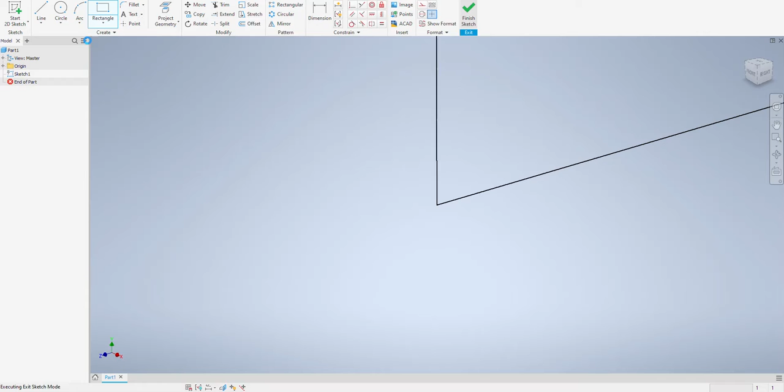The base is 1.5 by 3. I'm going to go ahead and extrude that base 1.5. So I have 1.5 by 1.5 by 3 right now.

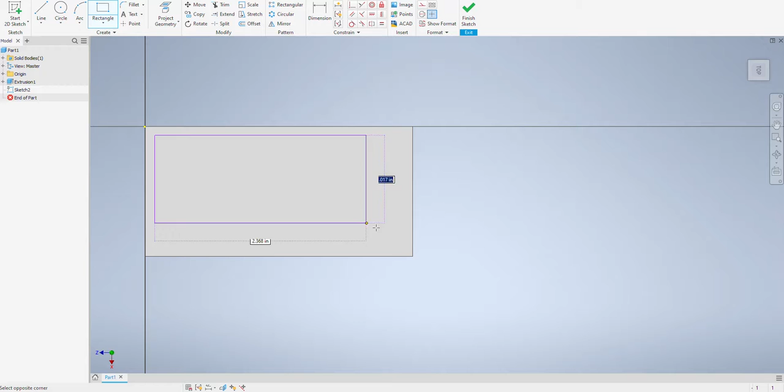Now I'm going to go ahead and draw on this to put the crowns in, starting with the center cavity. I'm just going to draw a rectangle in there and give it dimensions for the wall thickness of 1/4 inch.

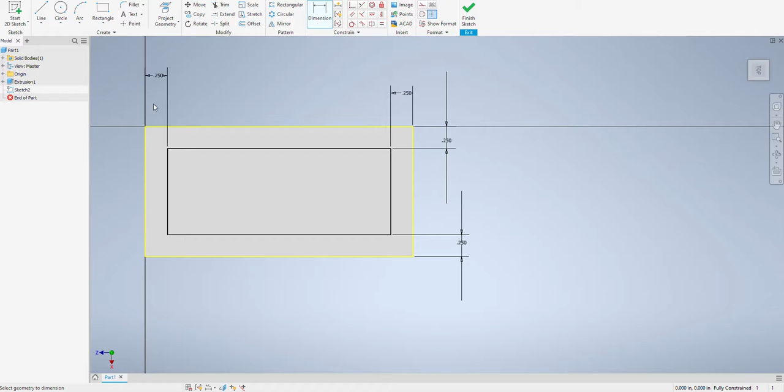For a dimensioning tool, I'm grabbing each line and just dimensioning between the lines. Finish, extrude that shape, cut a 1/2 inch down, 0.5.

We got the cavity. Now I got to make the crowns, so I'm going to sketch on the top again. I'm going to just make a rectangle like this, bigger than I need, and dimension from here to the edge of the rectangle to be 1 inch, and from here to the edge of the rectangle to be 1 inch, which leaves a 1 inch crown.

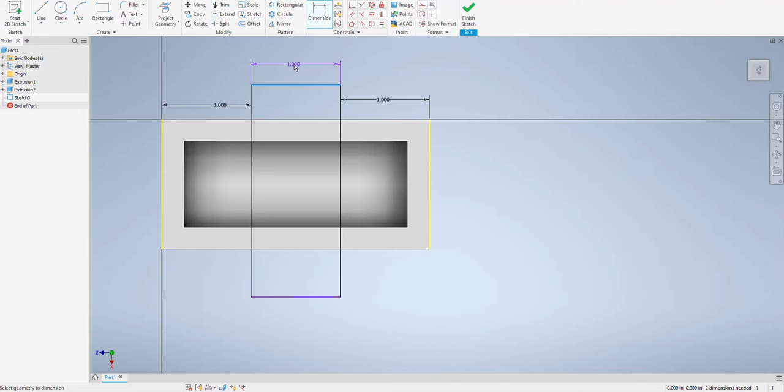Do the same thing in the other direction. Dimension from there to my edge of the rectangle in that direction is 0.375, 0.375. That should give me a 3/4 inch crown.

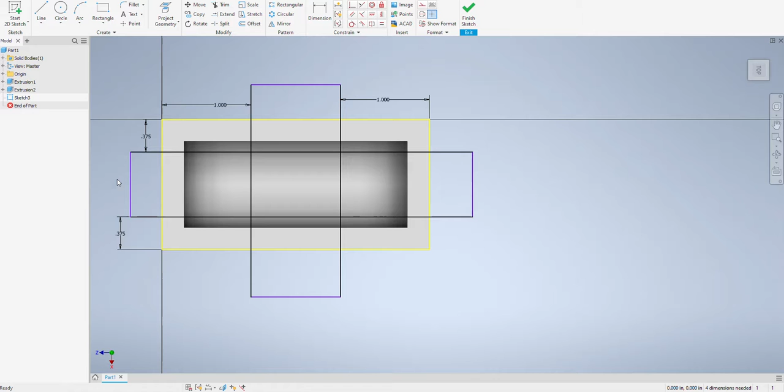Okay, finish, extrude. I want all of this, and I want all of that. Cut 0.25. There's my crowns.

All of that so far is not new content, but what we're going to be drawing for the feet now, for both sets of feet, is going to be new content.

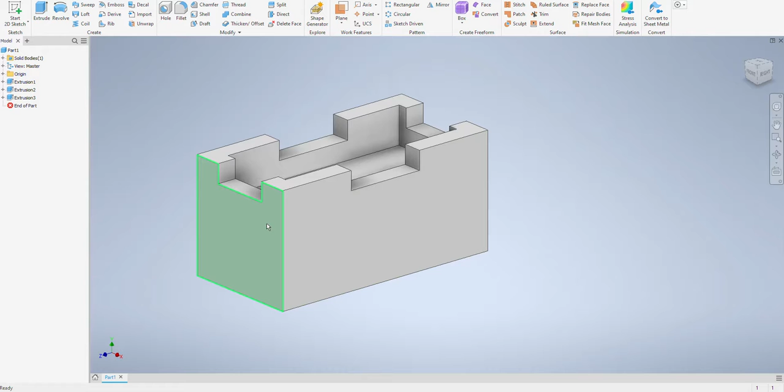First one we're going to do is a work plane. A work plane is like just another surface we can draw on, like we can draw on any of these surfaces, but if I want to draw in the middle of the part, I need a work plane.

So I'm going to go work plane tool. I'm going to click and drag on this front surface backwards. Click, hold, drag, and that's a negative direction. Halfway through the part would be 3/4 inch, so negative 0.75.

Now I have a drawing plane right through the middle of my part. So I can do sketch on that surface, and now I'm drawing, as you can see, right in the middle of the part.

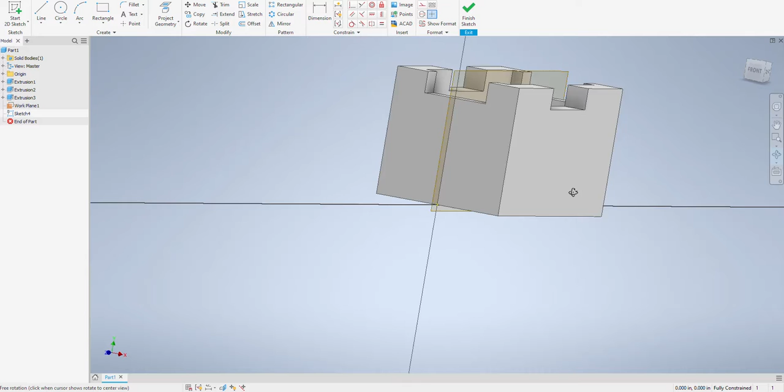Here's a quick tool so that you can see the middle of the part, nothing in front of it. I'm going to go to an isometric view when I do it just so you can see it happen. We are going to right-click, slice graphics.

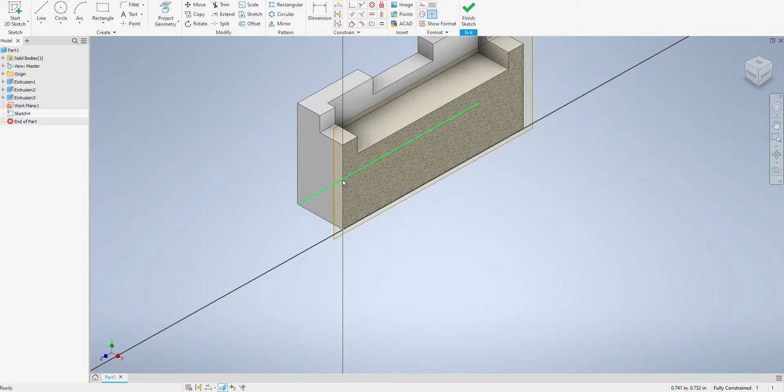Now we're in a sketch on a part that has stuff in front of it. So right-click, slice graphics, and it gets rid of everything in front of your sketch. So now I can draw my side feet.

Another new tool is going to be project geometry. I want to get this line as a line I can actually use. Right now it's not. I want that line, and I want the bottom line.

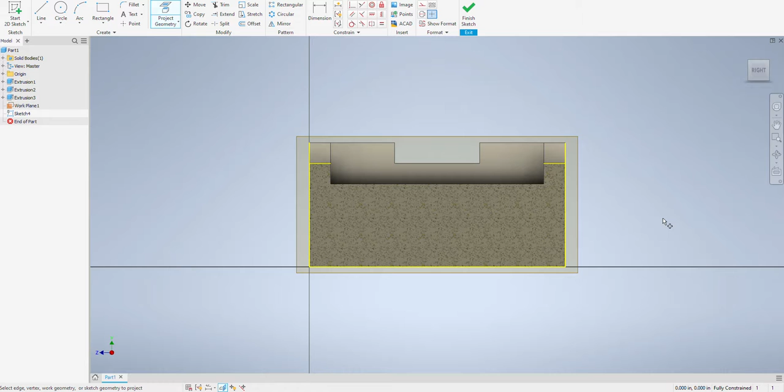So I'm just grabbing a couple of lines that I want on my sketch. Now that I have those, I'm going to draw my triangle foot. So it comes out here, 0.375, 3/8 of an inch.

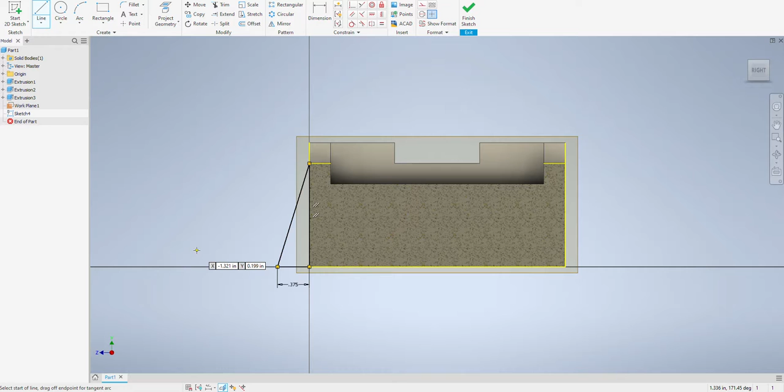New line, it goes up here until it meets that intersection. And then I'm going to close it off. There's my foot. When I finish sketch, you see I have a triangle in the middle of the part.

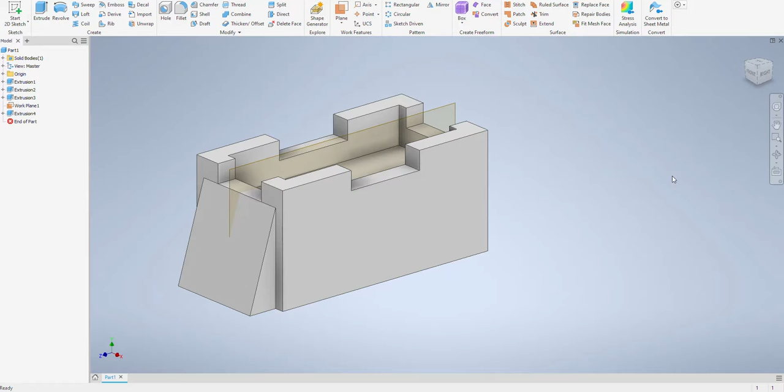I'm now going to extrude, adding material, so I'm leaving that, but I'm going to extrude it both directions along the midpoint, and it's going to extrude 1.25. And there is that foot.

Now I can do that all over again to draw the other side, or we can look at another new tool, which is going to be mirror. I'm going to make a copy of this foot along the center point to make a copy over here.

So I need another work plane in the middle of the part. Work plane, this time this side, grab, drag, -1.5, and I've got a work plane going through that direction.

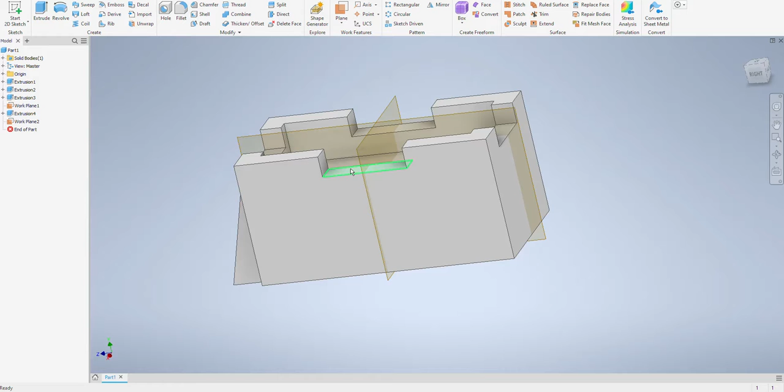So now I'm going to use mirror. Right here, what do I want to mirror? This foot right here. Mirror plane, I want to mirror it across this work plane. And it shows you it's going to make a copy over there.

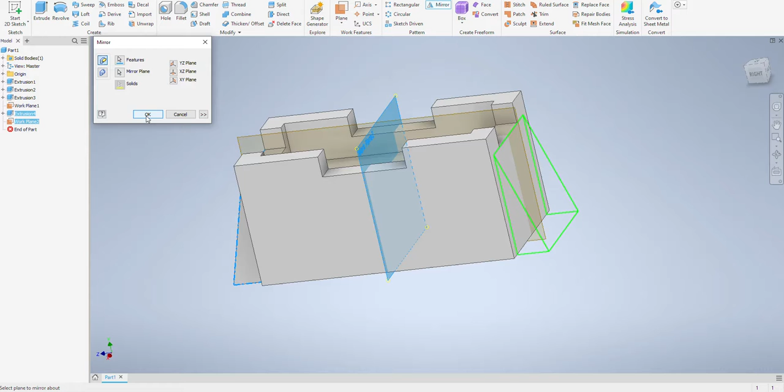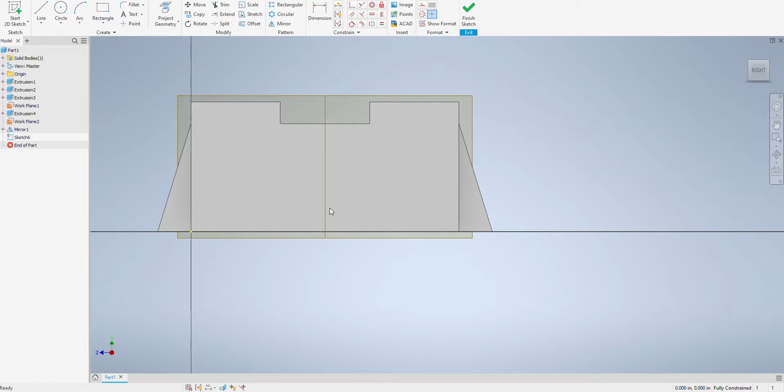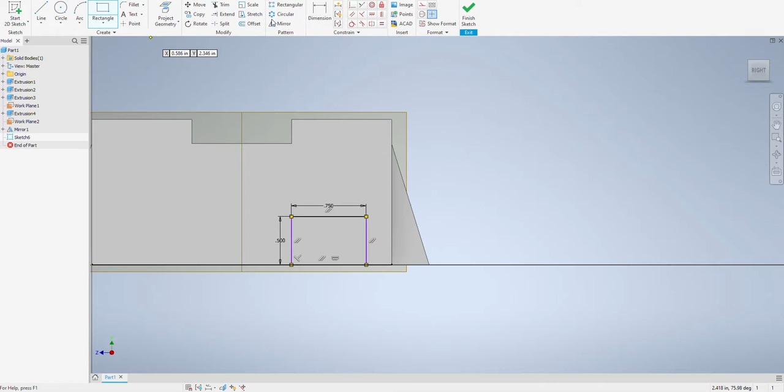I'm going to sketch on this main front surface. And I'm going to draw the back rectangle of the foot. And that is 0.5 tall by 0.75 long. And I know where it is. It's along the bottom, which I drew it on the bottom, and I'm going to dimension to the edge. That gap is 0.375. Finish.

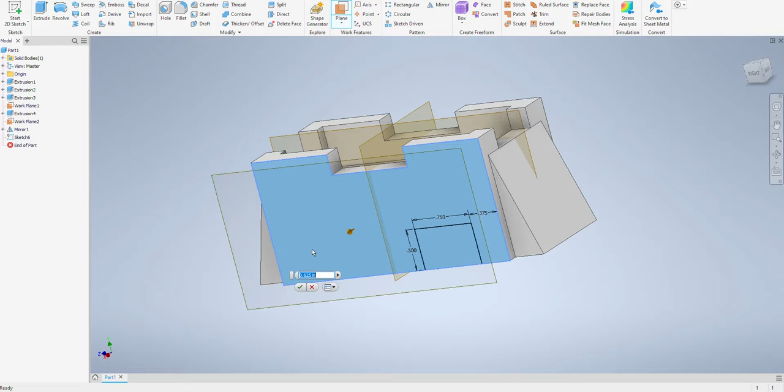You say, well, that's not the foot, and I agree, it's only the back part of the foot. The front part of the foot is out here in space. So again, we're going to use work plane. I'm going to grab this front surface, click, grab, hold, drag it out this time, not into the part, but away from the part. And I'm going to bring it out as far as the foot is. The foot is 0.5 out. So now I've got this work plane hanging out in space.

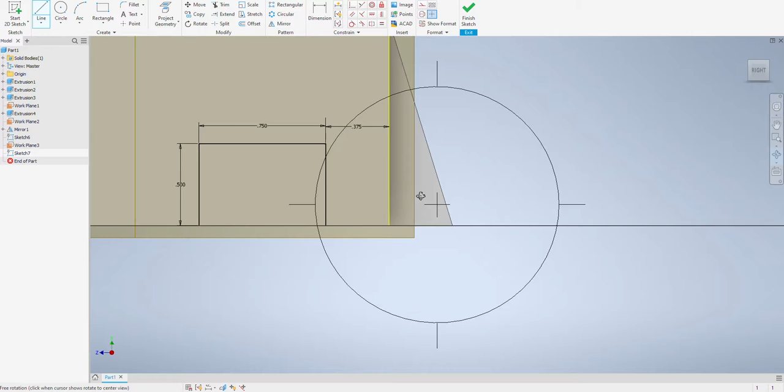I'm going to sketch on that work plane out in space. And I'm going to draw the front portion of the foot. But you'll notice I can't snap to any of the lines that are back there because they're not on this sketch. They're on the back sketch. I'm drawing out front. Well, we already used a tool that's going to bring those lines to us, and that was project geometry. So project geometry, I'm going to grab those 3 lines, and now, because they're on my sketch, I can use those as references.

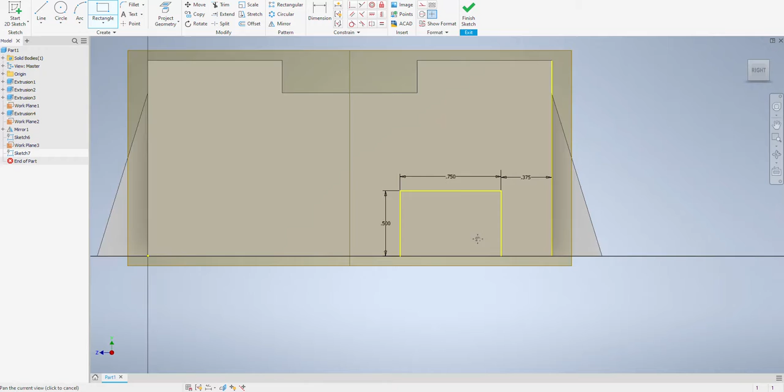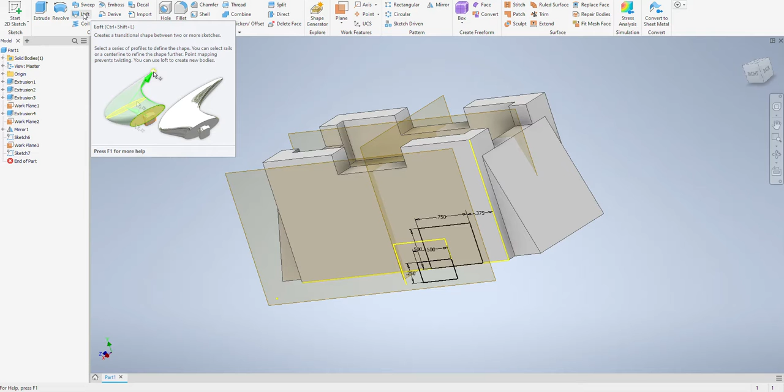So, rectangle tool, from this intersection out, the smaller foot is a 1/2 inch by a 1/4 inch. Finish sketch. And now we have sketch 6 as the back one, sketch 7 as the front one. Yours might not have the same numbers, but that's okay. And now we can use a tool called Loft. Loft is going to combine 2 sketches to make a shape. As you can see in the demonstration, when I hover on the icon, it's taking all kinds of goofy circles and ovals and making whatever shape that is. We're just going to go from 2 different rectangle sizes.

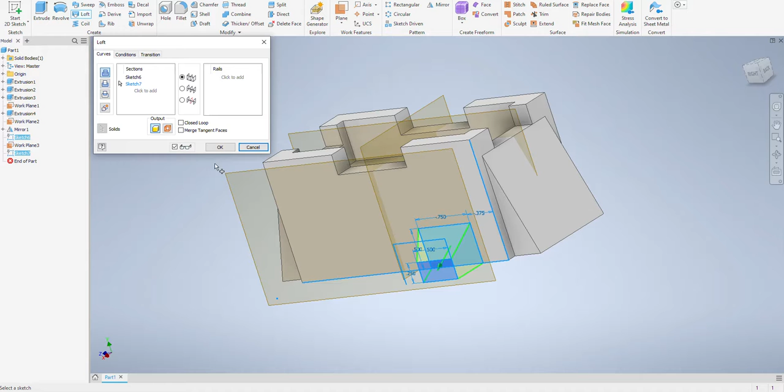So Loft. In here, pretty simple, click to add. So I'm going to click on the click to add. I'm going to go grab my back sketch, and it automatically grabs the rectangle. I'm going to come in here and do the click to add again by clicking this, click to add. And I'm going to come grab the front rectangle. And it shows what it's going to do, which I like, and okay. And there's the foot. Don't worry, we're going to do this again as practice.

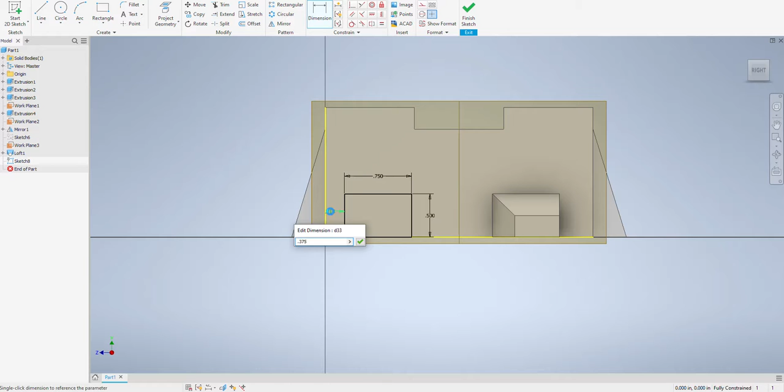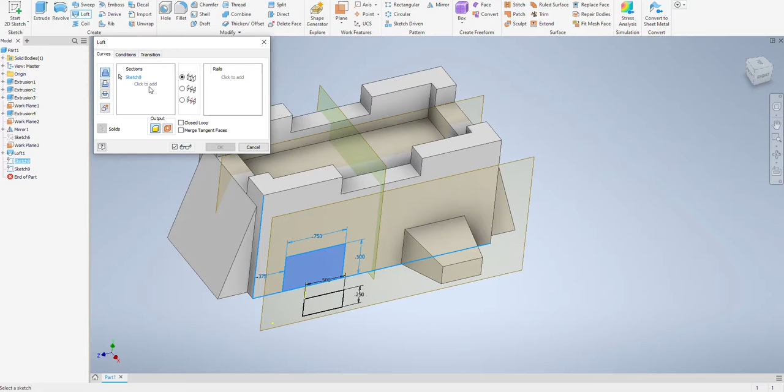So we're going to sketch on the back. We're going to make a rectangle that is 0.75 by 0.5. We're going to dimension it to the edge of the part to be 0.375, 3/8 of an inch. Finish. That's sketch 8. We're going to sketch on the front work plane out in space. We're going to use project geometry. And now we're going to draw the inner rectangle to be 0.5 by 0.25. Finish. And then we're going to loft, click to add, grab that back sketch. Click to add, grab the front sketch, and OK.

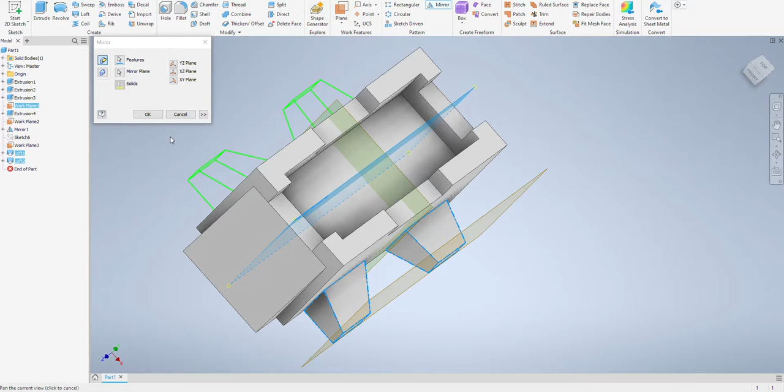Now we can keep doing this 2 more times, or we can just mirror these 2 feet across the part. Well, we've already done mirror, so mirror this and that foot. The mirror plane is the mid work plane. If we rotate, we should see it showing us copies, and OK. And there is your base plate.

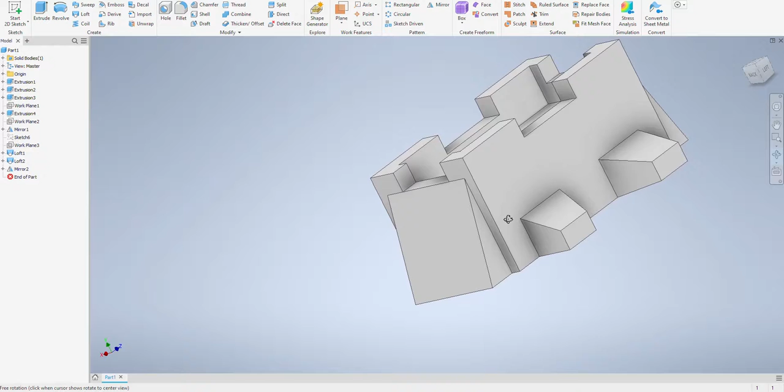We want to turn off all these not needed work planes. All we do is visibility. So right click over here, visibility, right click, visibility, right click, visibility. We're not deleting them in case we need them again. All we did was simply turn them off. So once you've gotten to this point, hopefully you've saved a couple of times as 3D02 base plate, and you can now upload that IPT file into Google Classroom to be graded, just like we did with the support file.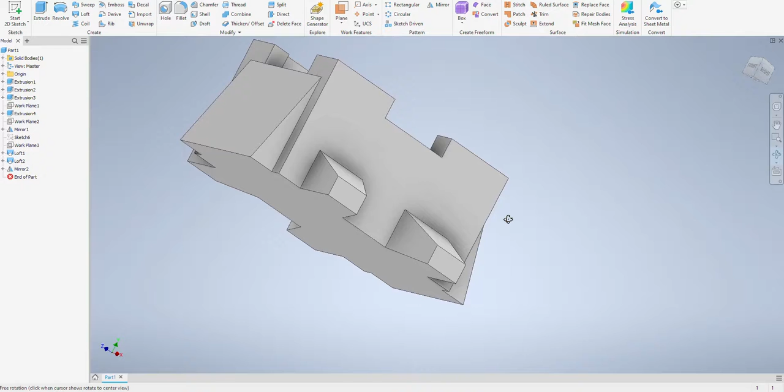So we have gone through the steps of drawing the base plate. A couple of new tools we used today. We used work planes so that we can find new sketch locations. We used slice graphics so we can get rid of stuff that was in front of it. We used a loft tool so that we can blend one shape to another shape. And we used the mirror tool so that we can make a copy of something along a center plane. So 4 new tools that we used today.

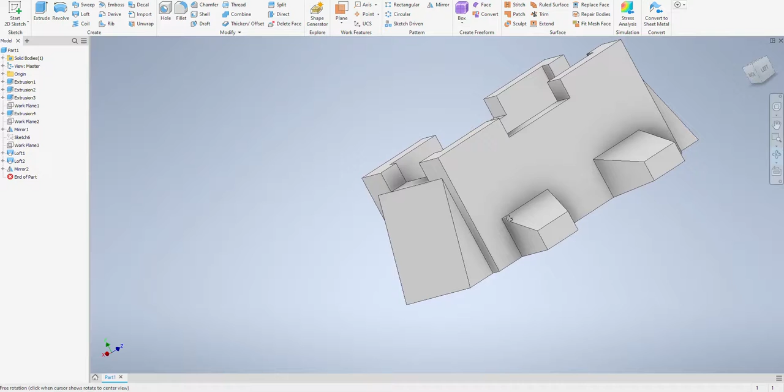You can back up this video as many times as you want to see those steps, or you can reach out to me for help. Good luck with completing your 3D02 base plate.